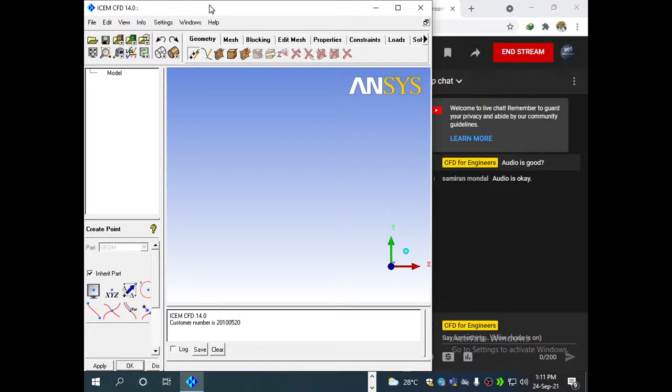Let's see one by one the purpose of each button and how one can use it. The first one is create point. This create point button is used for geometry creation.

If you use the XYZ explicit method, you need to draw as per the coordinate system x0 y0 z0. If you press apply, then you will get one point at the middle, that is x0 y0 z0.

Then suppose I want to move in the x direction, just change the x value to 50, apply, then press fit window to see where the second point is. Then again x50 y50, somewhere here. Then if I make x0 y50, it will come here.

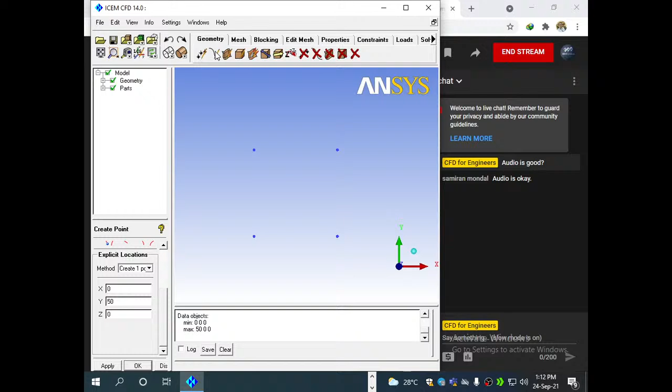This is the simple way to create points. From this point one needs to go for create curve or modify curve. First select the simple curve from point button, select the first point and second point, then press the middle button of your mouse for done. You may ask why not select 3 or 4 points at a time - it will try to develop one curve, so for joining only 2 points need to be selected.

This is for creating a line. So I am doing it. This is the first step - creating points. Second step is creating lines, and third is creating surface.

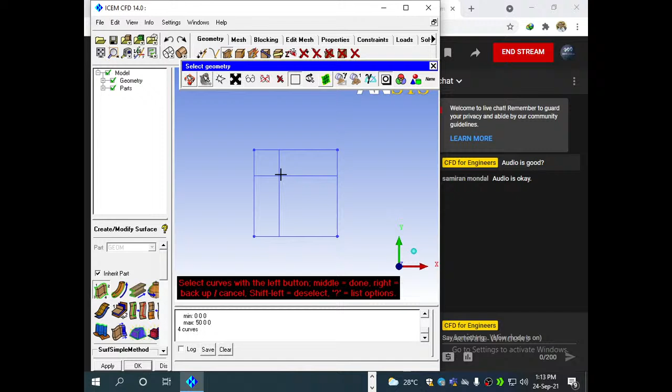How can I do this? Go for simple surface and select line 1, 2, 3 and 4. Say OK or done with middle button. This is the way one can draw a simple curve or simple surface.

Now if you are willing to use the extrude command, go to the sweep surface button. It asks for 2 points, point 1 and point 2, through which we need to extrude. For that purpose I will shift one of the points in the z direction. I will go to transform geometry, select one of the points, say copy, and use z is 50, say apply.

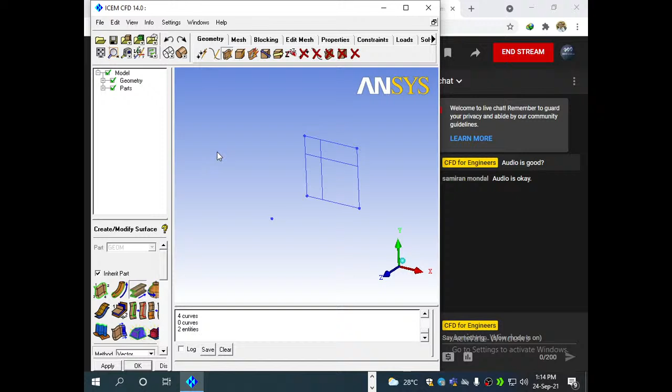Now I can easily get to know where is the z. Then the next command, extrude, we are willing to use. For that purpose, through point number 1 and point number 2, and the curve. Yes, this is the way one can extrude.

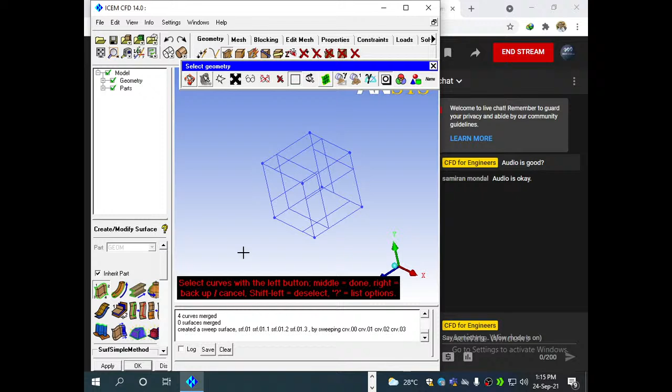Use simple surface to close. This is the simple surface. So if you go to solid frame, you can see like this. This is a good box we had created through line, point and surfaces.

Now, as we know this is the volume enclosed with surfaces, but what is inside we don't know, or how we can give material for this particular block. We are having the next button after surface, called create body button. Here you can give the name fluid. Suppose this total volume includes some fluid.

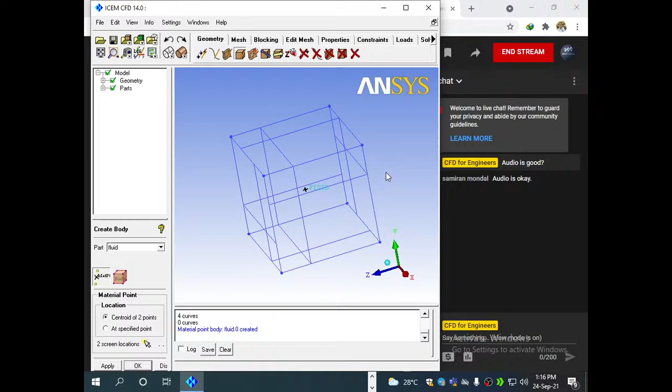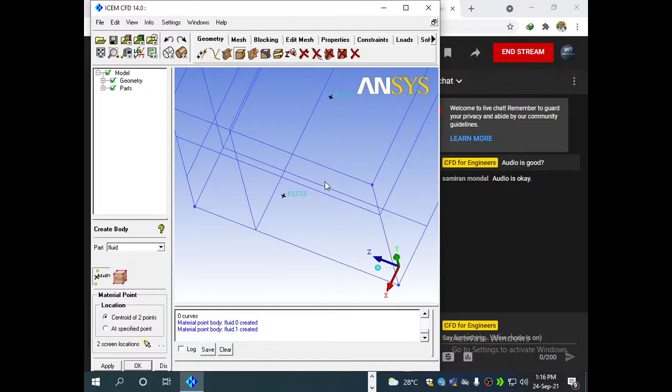Give the diagonal points and say OK. You may ask why diagonal, why not parallel? Suppose if I select dimensions which are in parallel on the same plane or one surface, then the material point is going to act on a surface. For that purpose it is not required - material is inside the volume, not on a surface.

Another way you can think why not on edge also - it should not happen that way. So always material point you need to give at the middle of the volume.

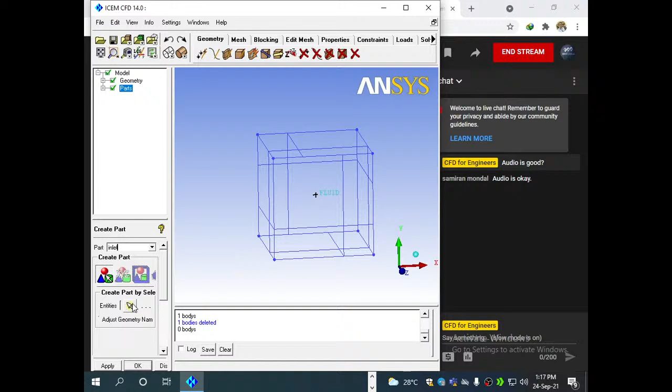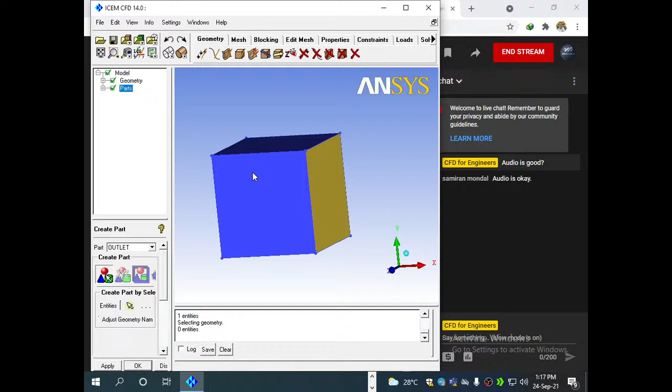Now if I place this volume like this, and suppose I want to give labels, how can I do it? Go to parts, say create part and say inlet. You can select the inlet surface, then go for outlet, select the outlet surface. Likewise you can give other part names also. This is one way by which we can create a box with different labels.

After that, go to mesh, say global scale factor 1 and apply. Go to compute mesh, say compute. Yes, it is auto mesh.

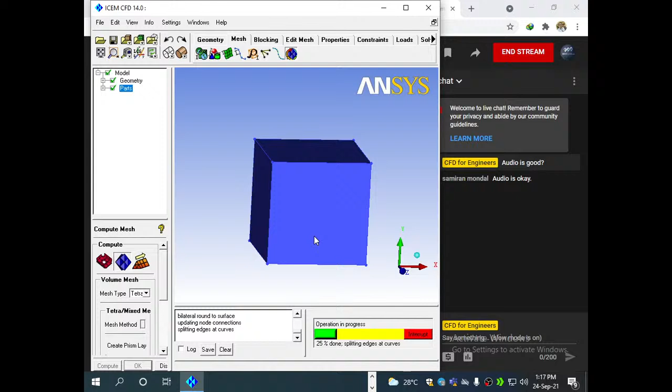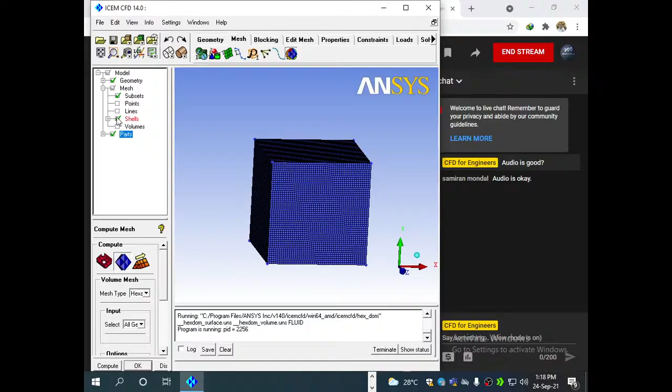These are the tetrahedral mesh. Suppose you are willing to change tetra to hex - yes, you can do it. So these are the mesh, hexahedral mesh, and previously was a tetrahedral mesh.

Once it is done, go for edit mesh, go for check mesh, say apply, go for quality, say apply. You can see the hexahedral mesh whose quality is maximum up to 1. Here you can see minimum is 1 and maximum is 1. Then go for smooth surface, say apply.

We will be waiting, compute. Some error is there. Wait for finish. Let me terminate it. Some problem is there, a technical problem. Even I say terminate it, it is not going to terminate. We'll wait for a few more minutes.

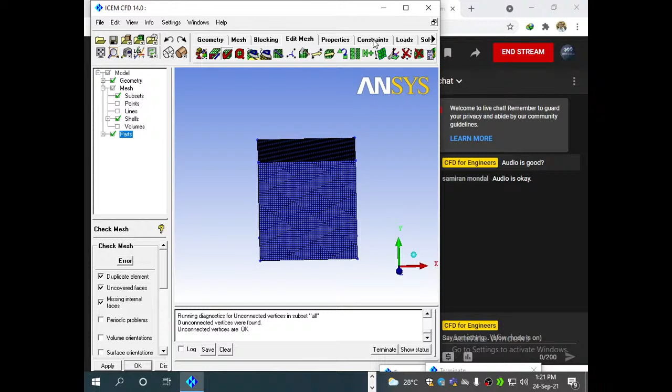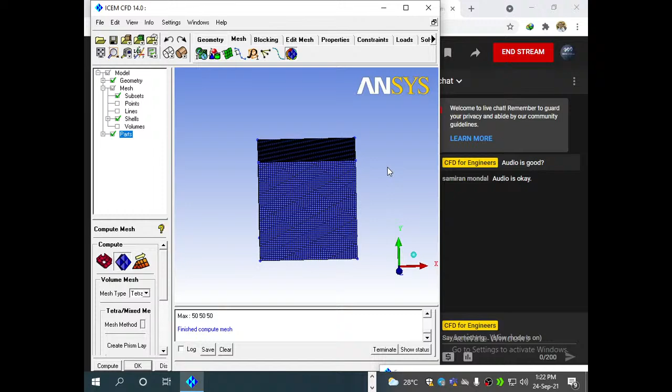So let me check what is the problem again. Wait for a few seconds. I think there is a problem. We can stop here because there is no audience. Go to end stream.